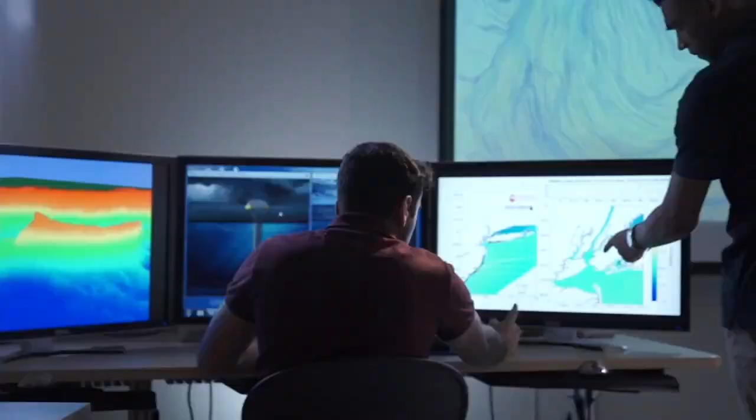In the Sustainability Management Master's Program, you're answering one simple question. Do you care about your future generation? If you care about your kids, their grandkids, then you care about sustainability. And a sustainability manager is someone who has the tools to make people understand how they can contribute towards developing a sustainable world.

We have both part-time and full-time students. Our curriculum is 30 hours. Instead of thesis, we have a research project course and a seminar course which provides them with the kind of research background they will need to be successful in their job. But at the same time, sustainability is not always everything about environment. It also relates to the business.

They will take a sustainable business strategies course. They will take a project management course. Most of these courses are going to be taught by industry people, the people who are doing sustainability on a daily basis as a part of their job. Any organization that has a large number of employees and has a physical infrastructure, they will have to have a sustainability office. If you have the passion to develop and maintain a sustainable world, come to us and we will help you shape your passion into a career which will create an impact.

A friend of mine, Stephen Eggett. Today's seminar is sponsored by the joint sponsor of the seminar series, which is WSP. So Steve is a vice president of WSP, and there he leads the operations of the downstate New York Earth and Environmental business line. So he has almost 30 years of experience in environmental engineering, sustainability, permitting, and compliance.

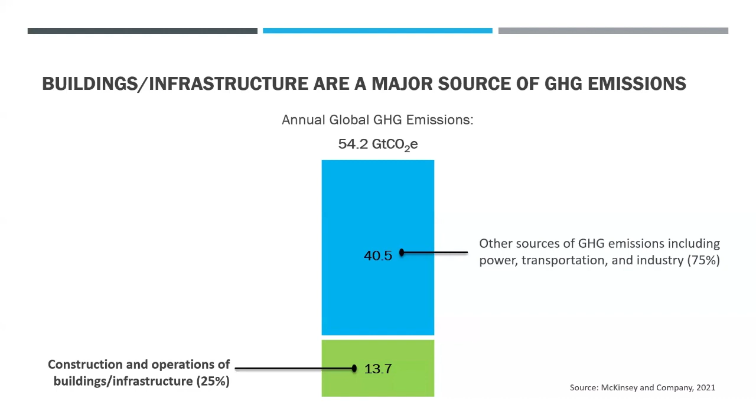So, it's a big chunk, 25%. Again, some information sources had it as high as 33%. So you can see why there's a focus on this now and why we're looking to minimize those emissions where we can. So of that 25%, we can further segment that a little bit to the construction and then overall operations of it. So the actual construction probably contributes more than you thought to the greenhouse gas emissions of infrastructure.

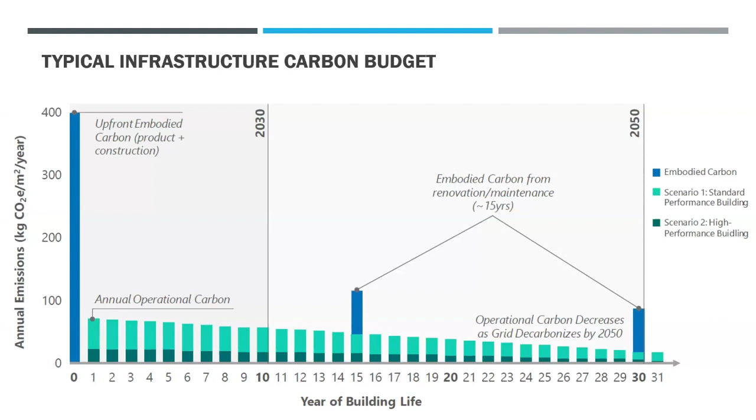So sorry, I went the wrong way.

Then the construction equipment itself, and the techniques, because not only the big yellow iron equipment out on a construction site, but a lot of times there's electric equipment or welding. So whether you're using the grid to power that or emergency generators, that all goes into your emissions profile. The waste and how you deal with it, because not 100% of what you bring to the construction site is used. And if there was an existing structure, like any typical New York City project, there's something there and you have to demolish it. So what do you do with the construction waste? All that again goes into your emissions profile.

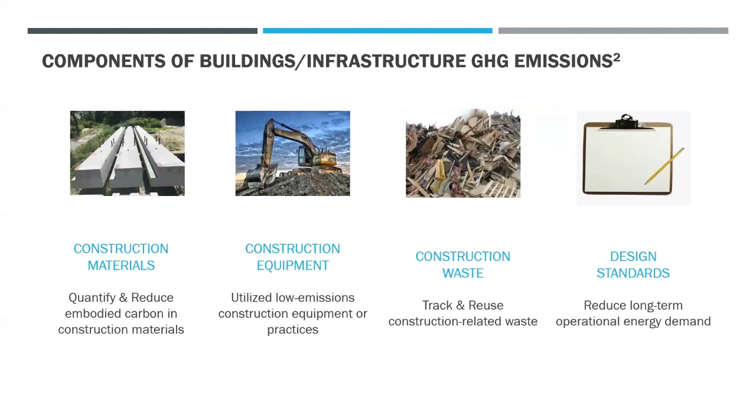And last but not least is the design standards that you're using, and how those affect the operational emissions. So it's something to think about. There's usually minimum standards for every project, like LEED Silver, as an example for buildings. But on the infrastructure side, are you using any design standards that would minimize any of these construction greenhouse gas emissions that we're talking about?

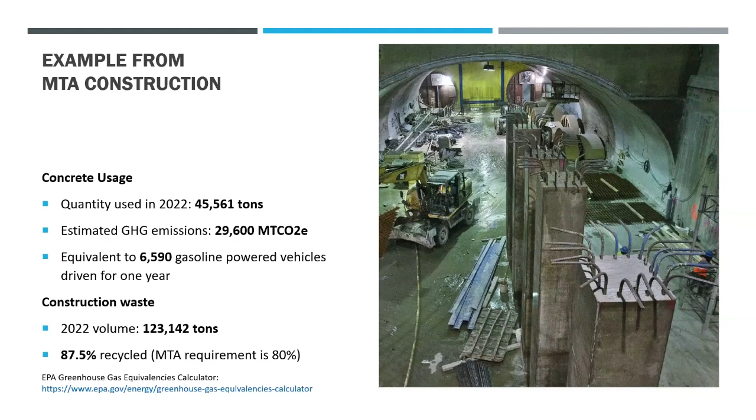And you can also see the construction waste that's generated from the projects, 123,000 tons, quite a bit. But you can also see that a lot of it's recycled. So look at how much of that is being diverted from the waste stream by MTA. And even the incremental amount, over 7.5%, goes a long way to reducing greenhouse gas emissions from these just going to a landfill, and avoids new materials being required to be manufactured. So it gives you an idea of the magnitude of the issue we're talking about.

So now that you kind of have an idea of a typical buildings and infrastructure project, I wanted to discuss this concept of embodied carbon. That's a concept that talks about the greenhouse gas emissions used upstream when you're developing a project: all the emissions that go into concrete, all the emissions that go into steel, and all the transportation of those products to the construction site. So the embodied carbon of an infrastructure or a building represents all of those emissions that went into the construction and potentially the demolition of that structure. You have to account for all of that when you're developing a greenhouse gas profile of your project.

Sometimes I think people think it's actually stored in the concrete, and that's not necessarily the case. We can maybe talk about that in a little bit. But what happens is all the emissions actually go into manufacturing and transporting all those products to a site.

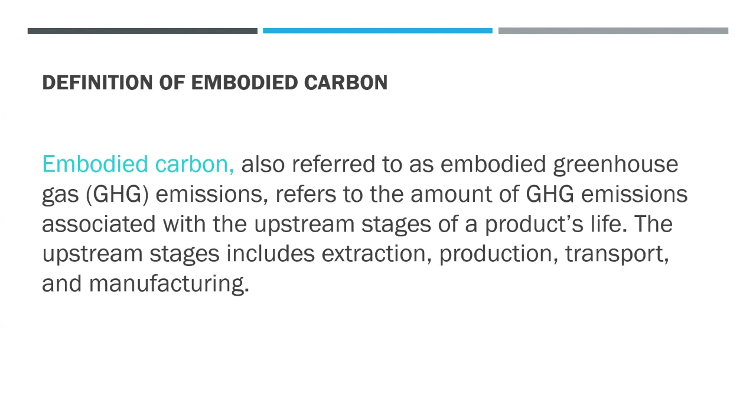And then when you're done with a project, how do you deconstruct it or demolish it? How is that waste going to be disposed of? For instance, steel. One of the most valuable commodities on a site is the steel. We'll see sometimes people bidding on projects where the price of the steel alone kind of underwrites the project a lot of times. We've seen people bid $1 million to demolish a building, and they pay for that with the steel that's recycled. So some of these products are very valuable, and there's a big market for them. For others, we're working to develop more of a robust market for recycling of construction materials.

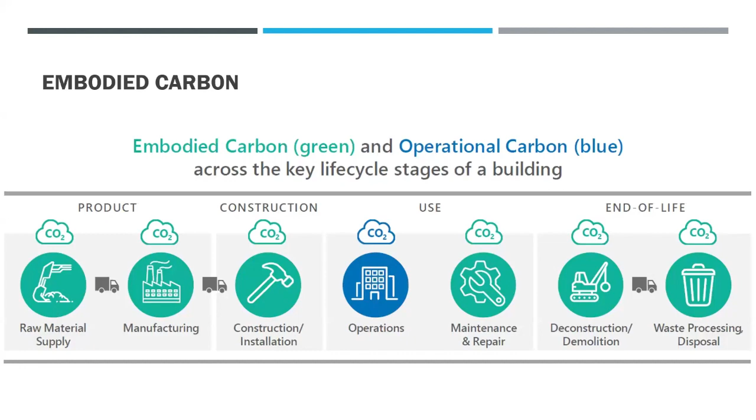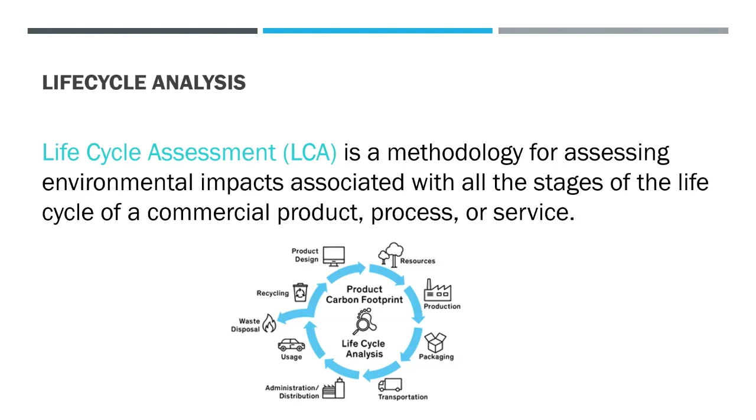And again, when we talk about embodied carbon, one of the ways to develop that is going through this life cycle assessment of an actual product to determine what that embodied carbon is. So you have the embodied carbon, and then the life cycle assessments used by the manufacturers to determine the actual embodied carbon of a material throughout that whole product life cycle that we talked about. So right here, that's the whole life cycle: this process of getting all the greenhouse gas emissions in all the different phases for a material.

There's an ISO standard that actually goes into all of the details of this and all the associated phases. So this gives you a little bit more detail. It's not just the nice picture here. There are all the different phases of use and all the different items associated with each stage. So this life cycle assessment calculates potential carbon emissions for all those different scenarios there. So you can see it can get very detailed as you're going through it.

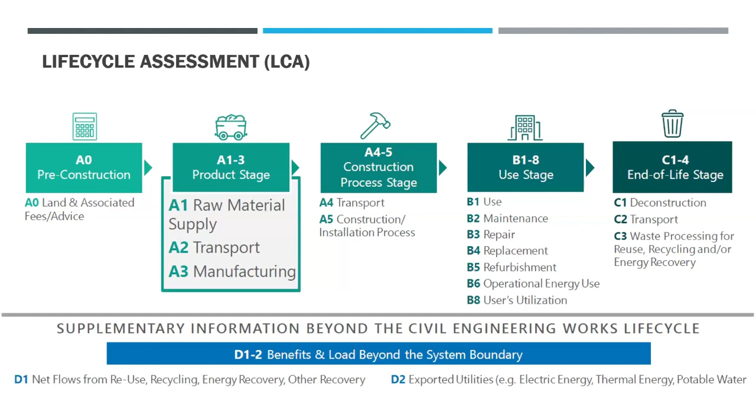So with that, when a manufacturer goes through and does a life cycle assessment for a product, they come up with what they call a product declaration. So this is one here that I use, and it's this cradle to gate kind of scope, and they come up with the actual greenhouse gas emissions for a unit of the product. So this right here is a meter cubed of concrete. So once you have that, you determine the actual amount of concrete you're using on site, and then you can come up with the embodied carbon for all the concrete that's used on site.

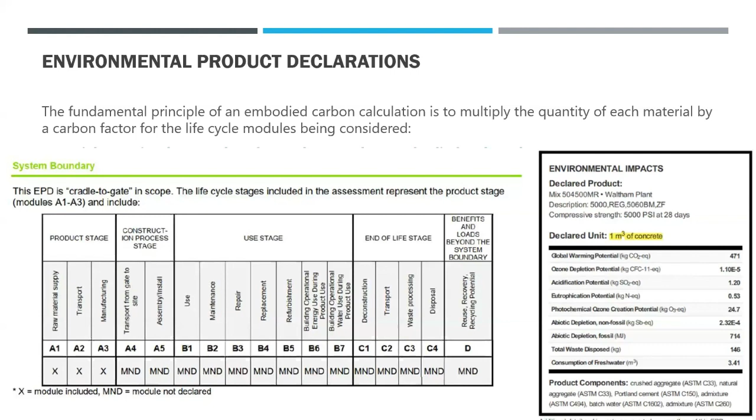So I want to just talk a little bit in this section about all the different construction materials and why people care about that. So first one is concrete. In your traditional cement manufacturing, it's 7% of global greenhouse gas emissions. So again, it's a big part of our global emissions. So it's important to look at that 7% and find out ways of reducing it.

And also, if we're talking about embodied carbon for a building and infrastructure project, depending on the type of structure, it's 50 to 85% of that. So a large portion of the embodied carbon goes into the manufacturing and transportation and setting of the concrete. So a lot of concrete manufacturers are looking at lower carbon alternatives, and there's a portfolio of ways that they're looking at that. One is the actual manufacturing of concrete.

Can they use lower carbon fuels or improve the cement kiln efficiency? So that's one way of working to lower the footprint of it, by using lower carbon fuels, say going from oil or coal, which is hard to believe people use coal, but they do. So going from that to natural gas, maybe even trying to make it electric, biofuels, but improving the kiln efficiency, so you're using less fuel in the manufacturing. So that's one way to do it.

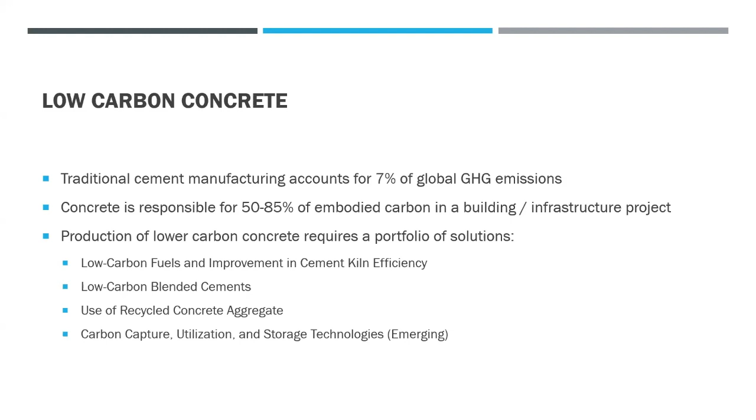So that's actually an emerging market. I know there's a lot of patents out there right now, and there's a couple companies that actually just formed trying to take advantage of this. So that's a growing market, but something I think we're going to hear about a lot more in the future.

And then with concrete, the other main building material is steel. So there's kind of the typical steel making process, which you'll see on the left, where they use a basic oxygen furnace. So this is lots of fuel, lots of raw materials to make steel. And that was what they used to make steel back at, like, the turn of the century. You'll see all those in Pittsburgh and other places, all the old-time manufacturing and steel mills. A lot of that was through this process.

And then when it was done, it wasn't recycled, because of a lot of the properties of steel, but also how valuable it is and the amount that it can be recycled. There's this newer way of doing it, where you're recycling the steel and also using an electric arc furnace in the recycling process to remanufacture the steel. And you can see from the numbers on the bottom there, the carbon intensity of that, 2.3 to 0.6. That's like a 25% reduction right there by using the electric arc furnace and also the

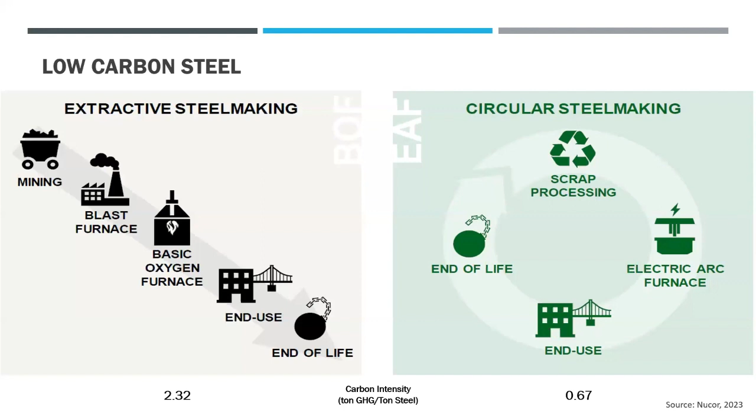recycled steel. So one of the sources there was a steel recycler, Nucor, which is probably the largest steel recycler in America. So obviously they're biased to it, but there is really a benefit with using recycled steel, and that obviously results in a much lower carbon footprint. So this is just some other information from Nucor, and a little bit of the ways that they're looking at their process so they can lower their carbon intensity right now.

So with concrete and steel, you can see all the efforts that are going on right now to lower the carbon intensity of these materials. This is also going on with a lot of other products out there too. Asphalt, glass. So all of this research right now is going into that. And the number one thing is recycling. Goes back all the way to environmental 101, right? Recycling of materials, using them again. So a lot of the ways that manufacturers are looking at reducing the carbon footprint is also how construction debris is managed and how it can be recycled in the future.

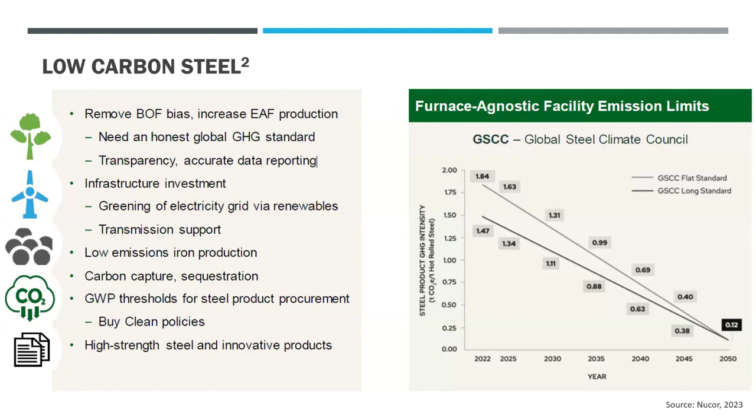So you can see some of the things that Nucor in this scenario is working towards lowering their carbon intensity. They feel like they can get down to like 0.12, when right now they're at 0.46. So they feel like they can get to even 25% of the 25% that they're at right now. It just shows you some of the stuff that the manufacturers are doing, but there are also policies.

So in this area, a lot of this is driven by the market, and the market's driven by policies that are out there, at the federal, state, and local level. There are a lot of policies that are starting to drive this. And also there are private companies too, the Amazons of the world and the Googles and Microsofts, who are really very progressive in what they're doing on the sustainability side. They're doing this and looking at this for their projects as well. I'm just going to talk a little bit about them.

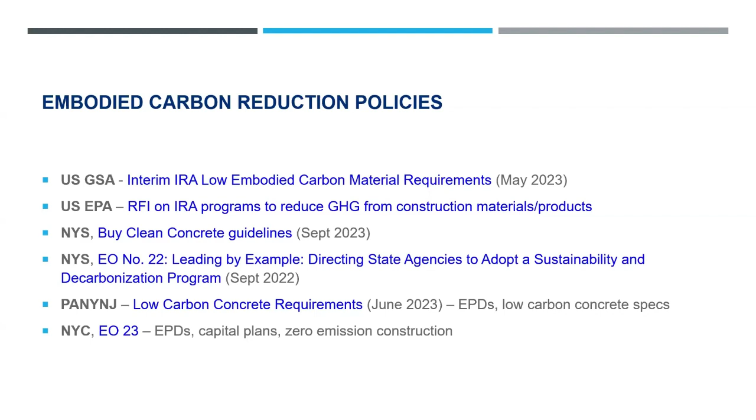So again, one of the first things that caught my attention on this subject is the New York State Executive Order 22. This applies to New York State agencies and contracts over $1 million that have these thresholds of materials. Right now, this executive order isn't necessarily dictating a certain embodied carbon in the projects. If you're meeting these thresholds, what you have to do is determine what the embodied carbon of your project is, and then report out on these materials.

And the good thing is they're going to be developing this database of all these items that are going into projects in New York State now. So you can choose the lower carbon materials going forward. This kind of reporting and this database is really going to help, I think, expand the knowledge in this area quite a bit going forward.

So right now, this isn't dictating a specific number or amount of embodied carbon. But if you meet the thresholds, you have to get the environmental declarations of the projects you're doing, calculate your embodied carbon, and make sure you're reporting on that. That's going to be done on an annual basis, but project by project by the agencies. And the first report is due, I believe, this June or July. So we'll be getting these results, and right now it's a reporting function, but it'd be interesting to see how these go down over time. So that's New York State Executive Order number 22.

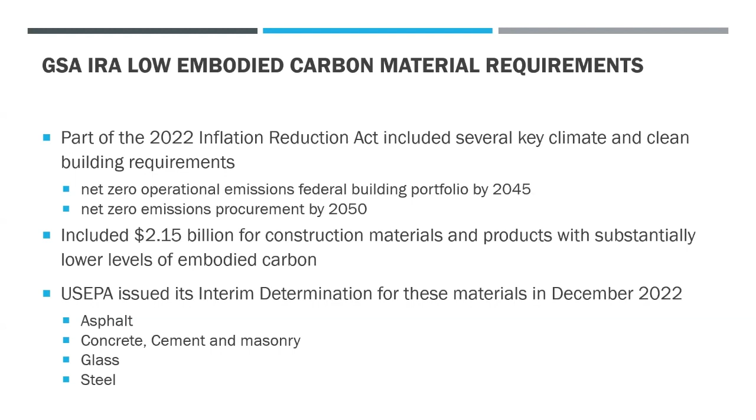So right there on the federal level, they're driving this market now for the lower embodied carbon materials. This is the same thing that actually happened for recycled paper, where you can't even buy other types of paper anymore, because once the federal government made that a requirement for purchasing, it just filtered through the industry and everyone had to do it. So they sort of set the market there. So they're doing the same exact thing here on the lower carbon construction materials and products.

The other one I wanted to talk about is the Port Authority of New York and New Jersey. They have a clean construction program, and there's a couple different elements to it. A long time ago, Port Authority developed their own sustainable guidelines for buildings and infrastructure, and these actually predated LEED and the Envision certification, and really set how sustainable design for Port Authority buildings and infrastructure worked. So that was the initial one they came out with, probably 15 years ago.

But since they've come up with them, they've revised that and have different construction requirements, which MTA also does too, for lower emission vehicles. A certain amount of construction waste has to be recycled, and they're also having low carbon concrete mixes. So they're actually specifying that. Again, they have requirements for environmental product declarations for their large projects. They also have, I think, two kind of innovative programs.

They're not only telling people to recycle certain parts of their construction waste, but they're having a matching and reuse database that they maintain. So if you have a certain construction project, you can see different vendors and uses in the area. So it helps you find different ways for the materials to be recycled versus just having it sitting on site for a while.

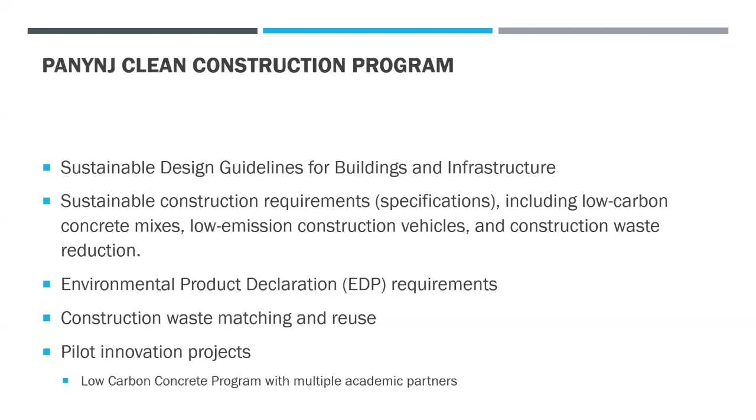This just gives you a figure here related to their clean construction program. So you can see the different elements. I think we talked about all of these already, the different elements going into their clean construction and how they're trying to lower the carbon footprint in their infrastructure projects.

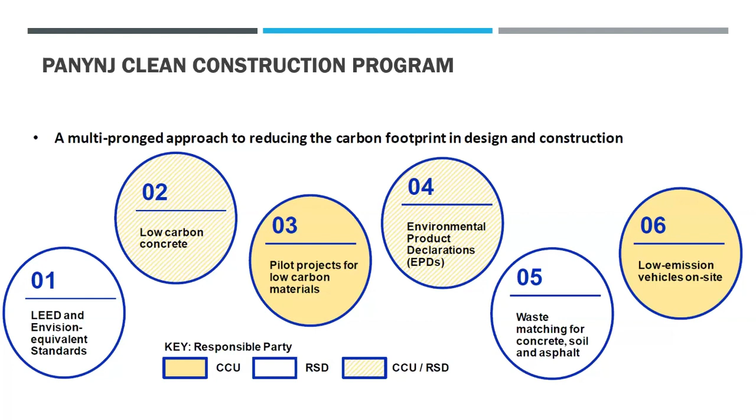So, last but not least, the other thing I did also want to talk about is the ASCE Sustainable Infrastructure Guidelines. One of the interesting differences between this and some of the other requirements that I talked about is that ASCE, before they came out with these sustainable infrastructure guidelines, developed the Envision rating system. The Envision rating system is a certification that you can get for your projects that allows you to go through the whole design process and figure out sustainable measures for all different elements of the project.

So what the ASCE standards did is take that and build upon it with all the different concepts we were talking about today: embodied carbon, doing life cycle assessments, resiliency. And the one thing that ASCE also includes is the triple bottom line, or sustainable return on investment. That concept is similar to your typical return on investment, but also looks at the environmental benefits of a project.

And especially when you're dealing with public agencies, a bus depot for MTA, for instance, isn't a money-making project. It is a societal benefit. So if you're deciding between different options on a project like that, the overall sustainable return on investment is at times a good way of determining whether an additional feature of the project is really going to bring a benefit. So those are some of the differences and nuances of the ASCE Sustainable Infrastructure Guidelines and how they are slightly different than the other regulations and standards that we're talking about.

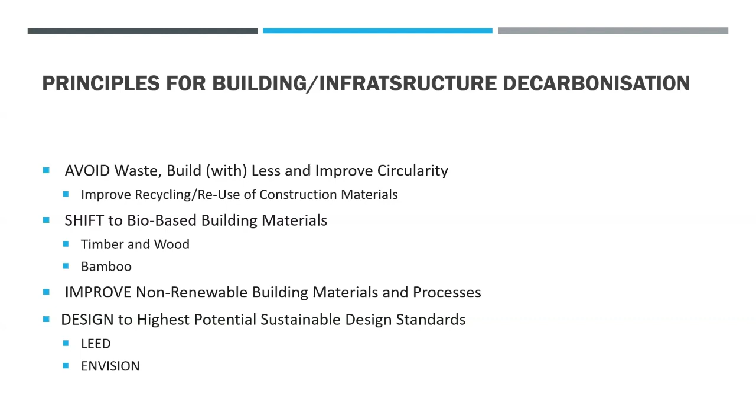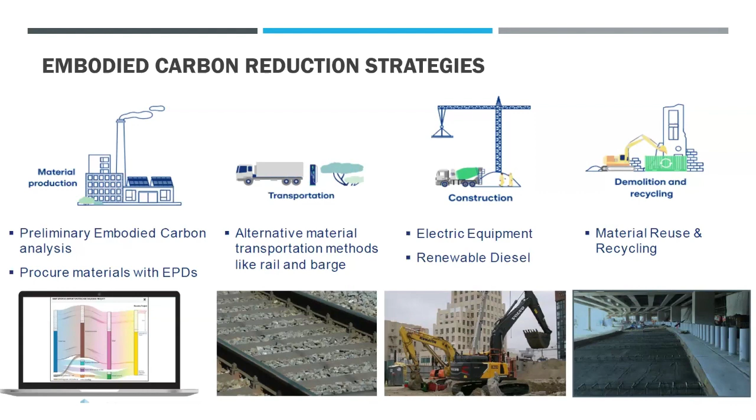And last but not least, look at your materials, how you can reuse and recycle everything, using materials with a high recyclable content. That goes a long way to lowering the impact of infrastructure, which is what we're trying to do here. And there are some other guidelines for you, and there are a lot of others out there. These are just some of the ones that I used in the development of the presentation.